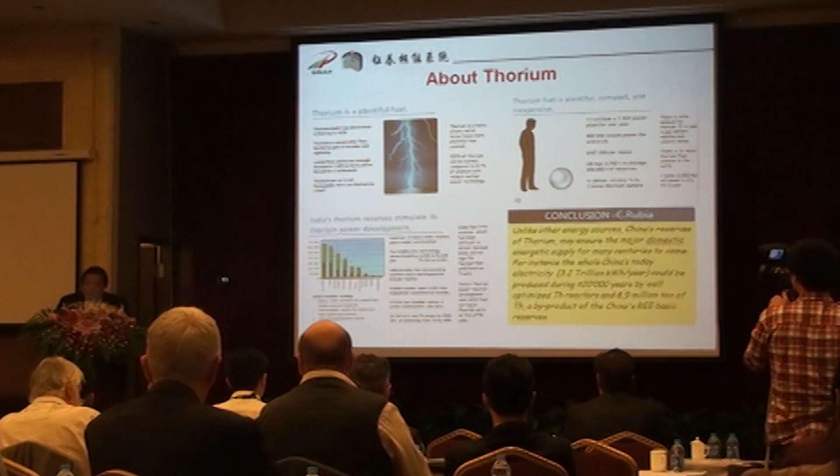There are many reserves, usable for many years, about 20,000 years estimated. In China, there is much more thorium than uranium. This shows that if you want to do breeding, you have to meet conditions of greater than or equal to certain values.

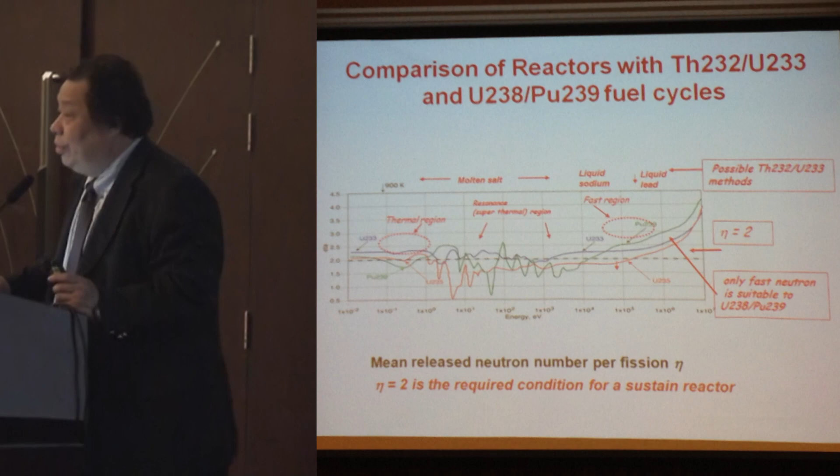This area is the so-called thermal region, and the resonance region is the molten salt reactor working region, which is more suitable for thorium fuel.

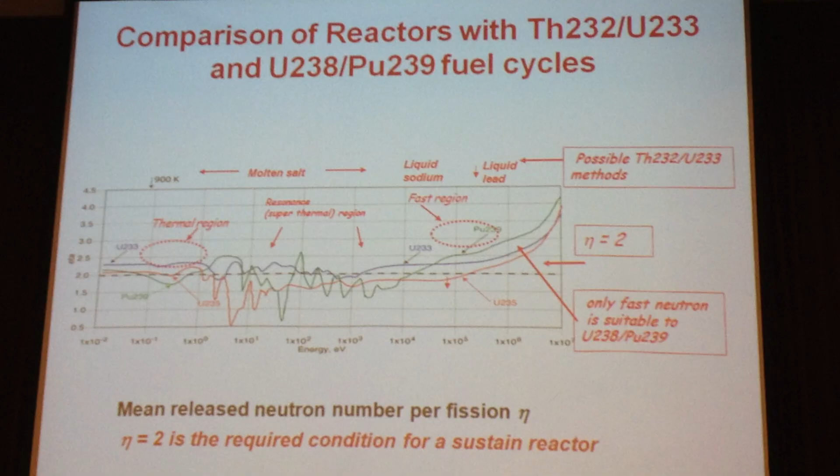The typical molten salt reactor was built by Oak Ridge 40 years ago. American scientists have been working on molten salt reactors for different aims for many years, from the 1940s up to the 1970s.

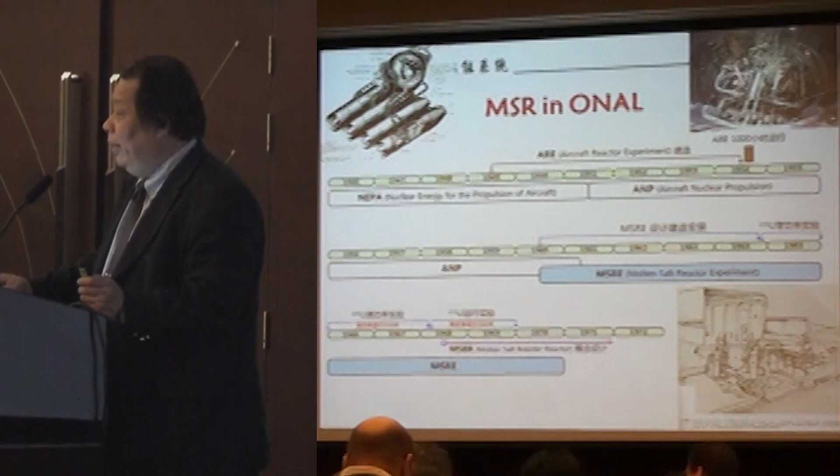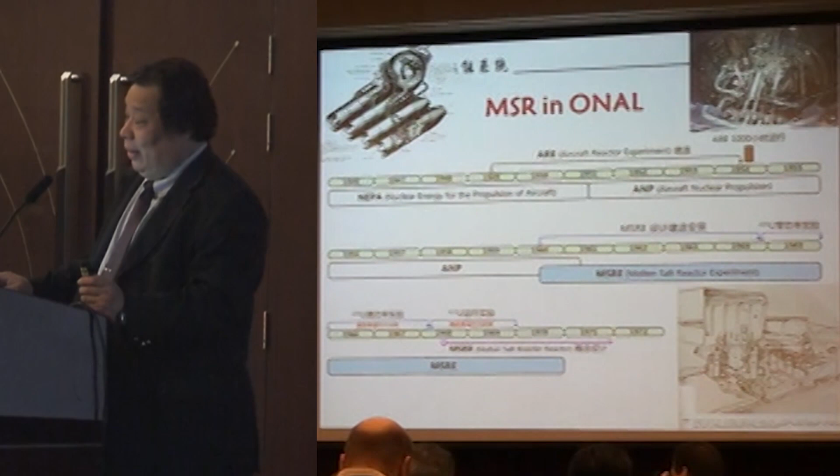At first it was for the aircraft, and then it transferred to civil applications. The MSRE was built and operated successfully for almost 5 years, accumulating many results that form the basic scientific foundation for today's MSR discussions.

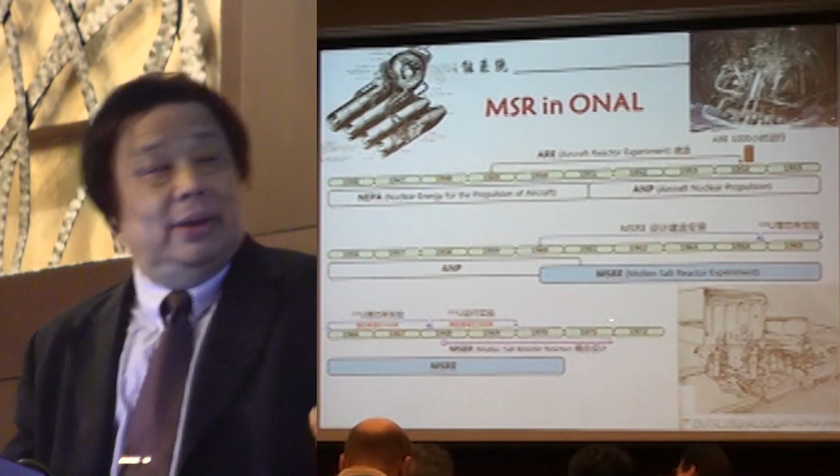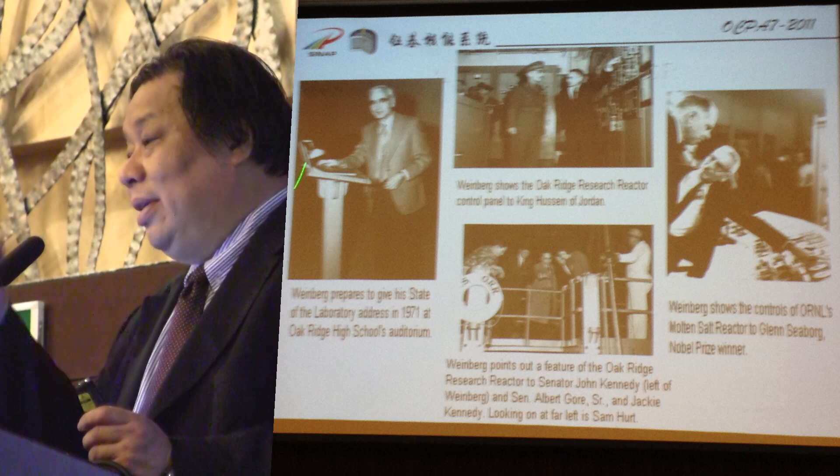They also made a design for a gigawatt MSBR, but just a conceptual design. This is a photograph of Alvin Weinberg. I got a slide from a paper for the Weinberg Foundation. Weinberg was a pioneer of many things, one of them being the MSR.

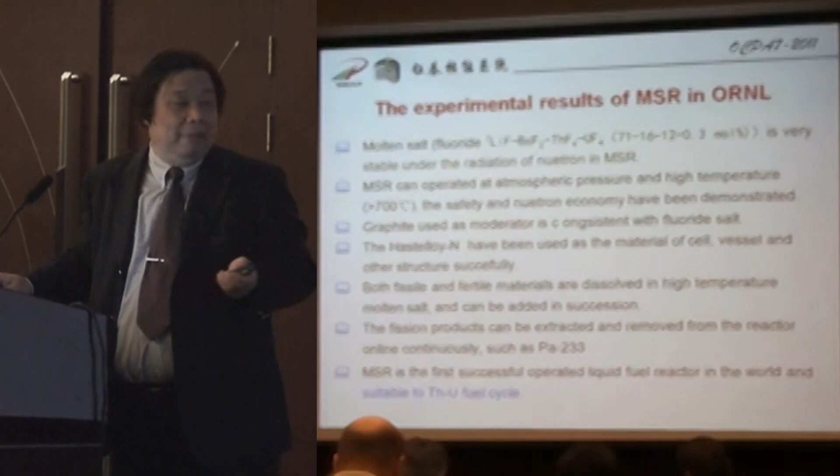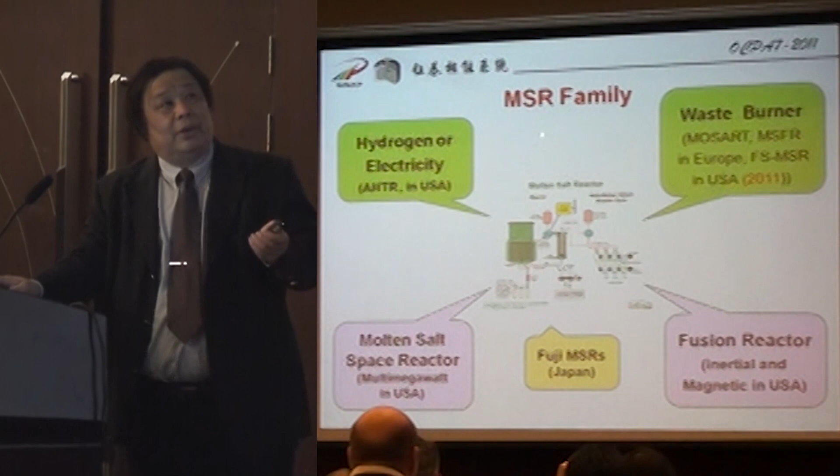This is some results from the MSR experiment at Oak Ridge National Lab. Later, the MSRE was shut down in the middle of the 1970s. Still, there are some research activities in the world. We can show the so-called MSR families here.

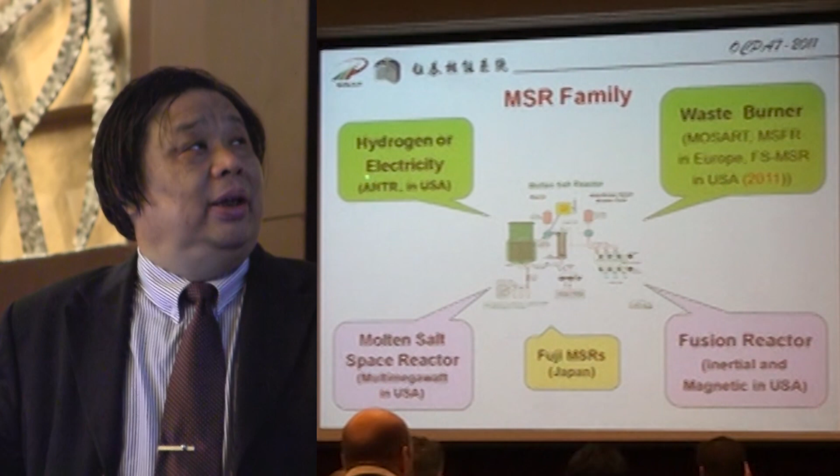The first one is used for hydrogen and electricity production, named the Advanced High Temperature Reactor, mainly in the United States, recently renamed FHR. This one is the so-called waste burner.

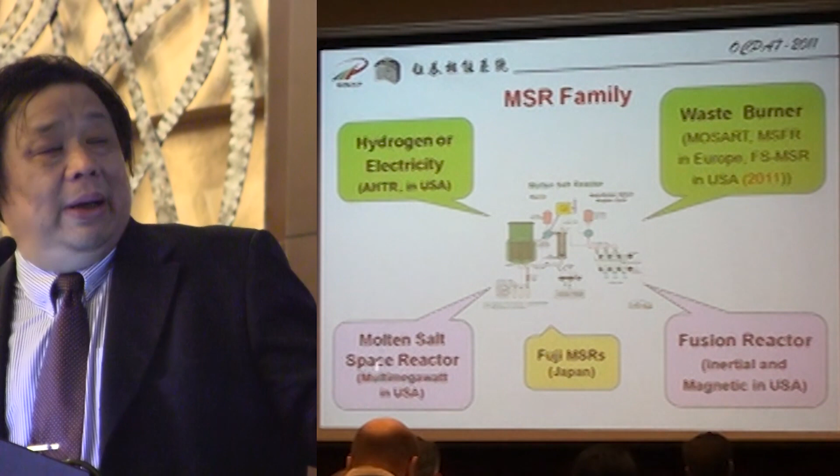There are programs like MOSART and MSFR in Europe, and FS-MSR in the United States. This one is used for space reactors, mainly with designs in the United States. There's also a design combining fusion with fission, the so-called hybrid nuclear reactor.

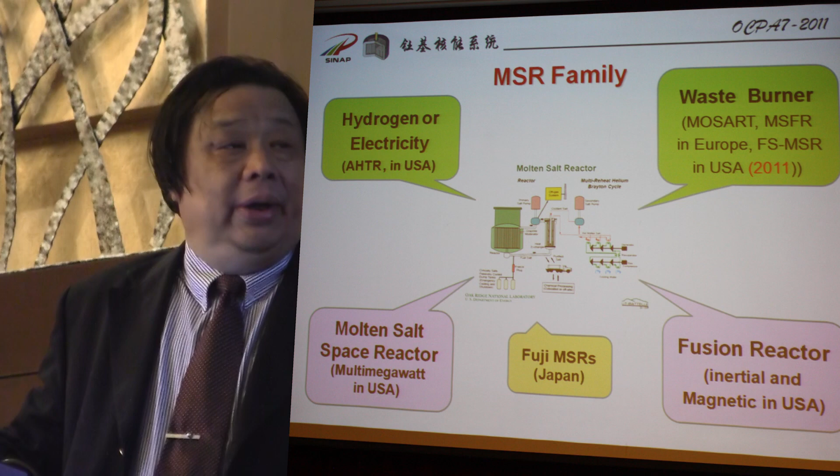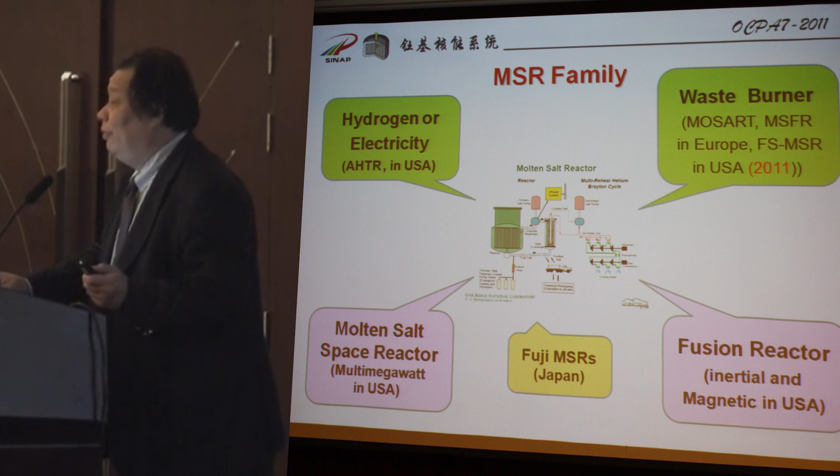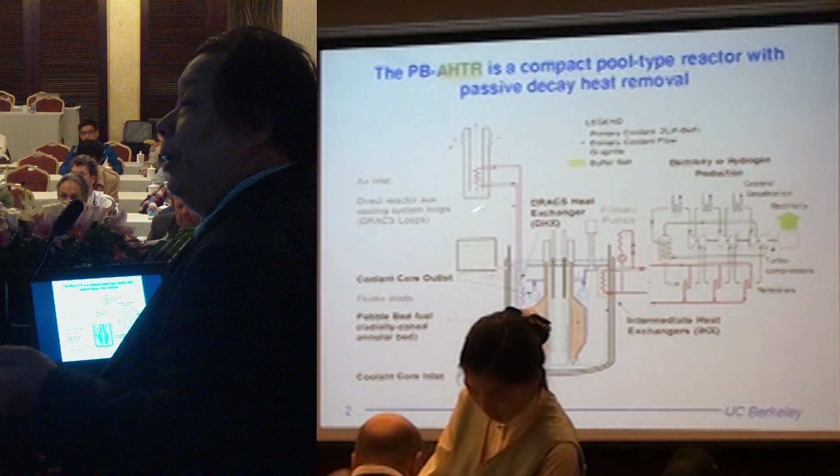And this is the Fuji design. The Fuji design makes the MSR one candidate of the fourth generation reactors, one of the six. The Advanced High Temperature Reactor design is performed by UC Berkeley.

This is the so-called baseline design. These FHRs combine several major technologies together to provide new ideas for the next generation of reactors, the so-called passive safe power.

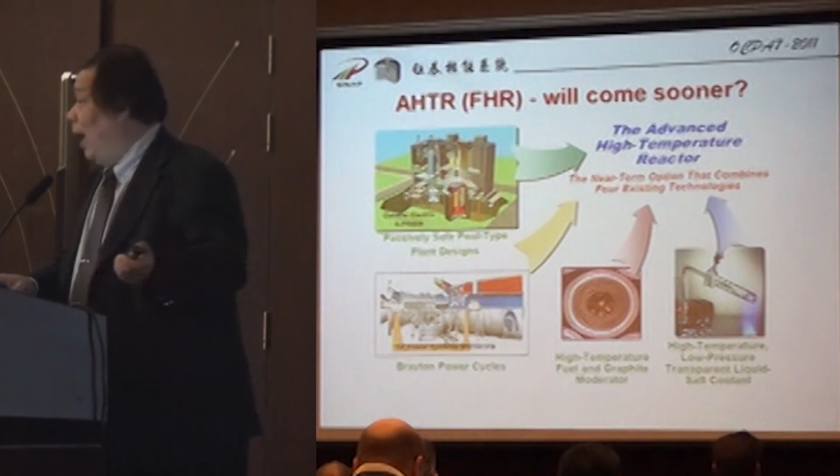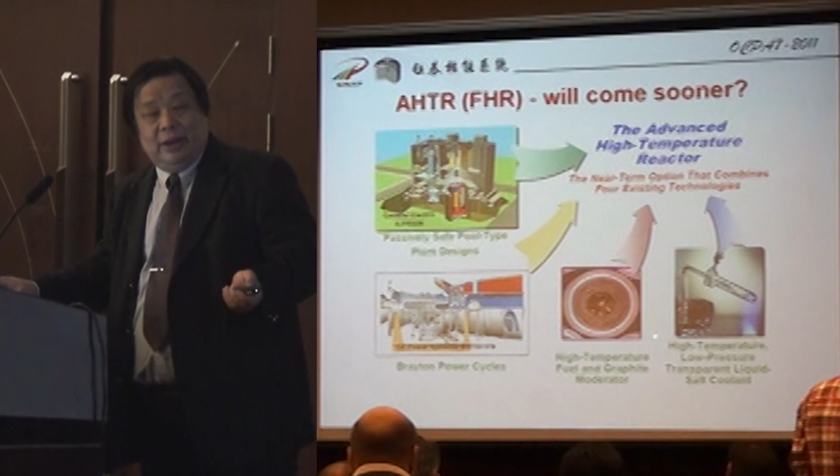This comes from liquid-cooled reactors such as sodium fast reactors and so on. The Brayton power cycle provides high efficiency. This so-called TRISO fuel provides safer nuclear technology. And this is a very important technology, the so-called molten salt reactor, which is high temperature, low pressure, and a transparent liquid salt coolant.

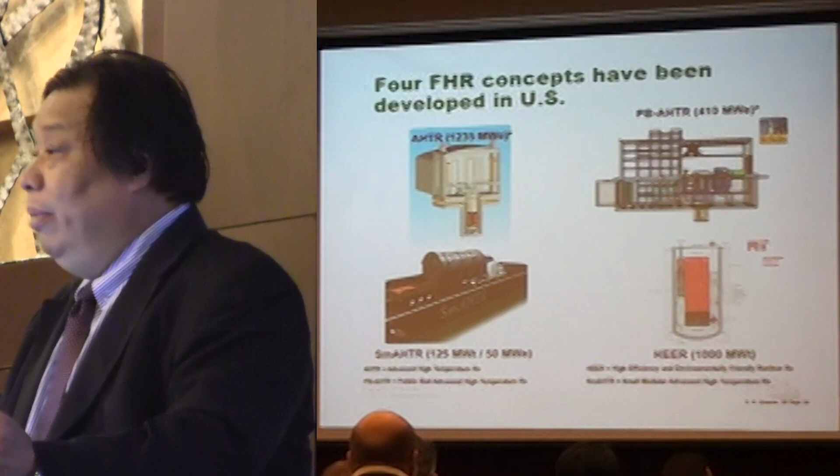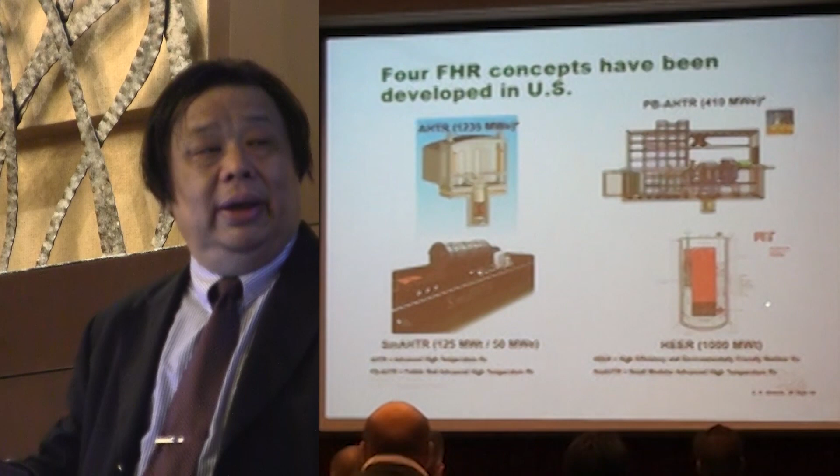Based on these several kinds of technologies, American scientists made several designs for the FHR: a large scale design, a small scale modular reactor design, and the baseline design by UC Berkeley. This one is designed by MIT, and this one by Oak Ridge.

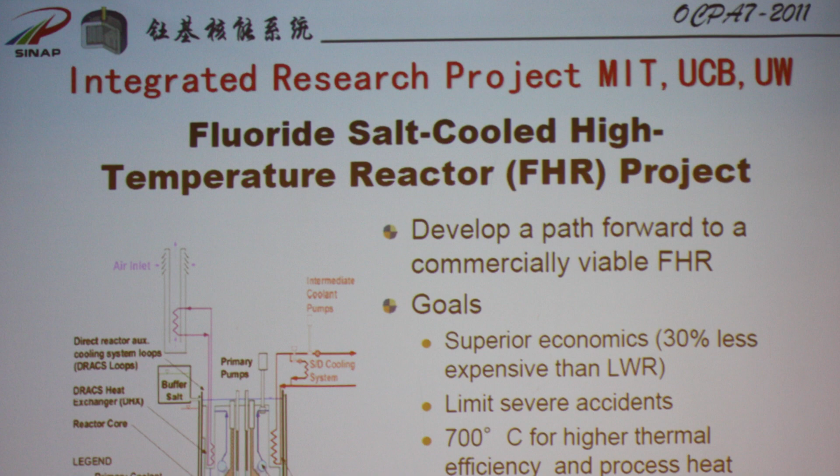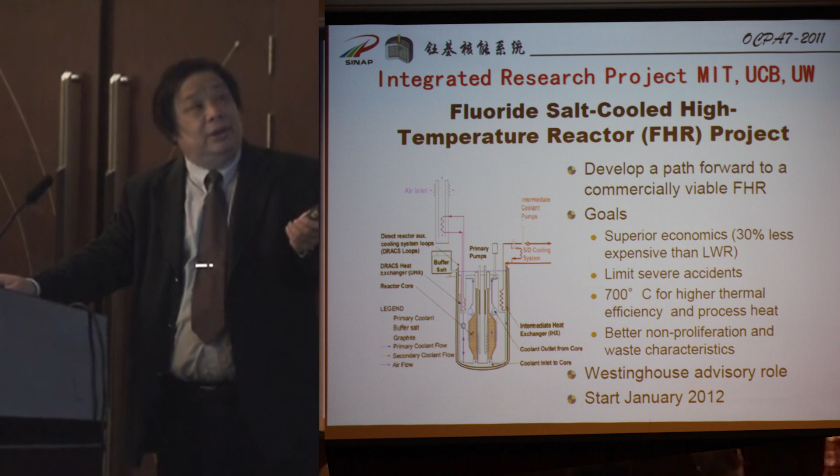The DOE initiated a project, the Integrated Research Project (IRP), performed by MIT, UC Berkeley, and the University of Wisconsin to research FHRs. This is the content of the project. Oak Ridge National Lab and Idaho National Lab have been engaged in this project, with Westinghouse as advisor.

The first national conference on thorium was held in 1965. ThEC12 at SINAP.

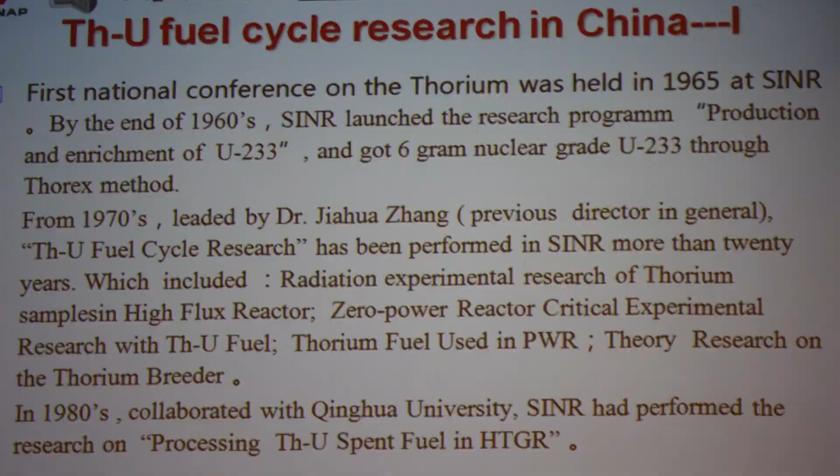uranium-233 through the Thorex method. From the 1970s, led by Dr. Jiahua Zhang, the previous director general of SINR, the thorium uranium fuel cycle research has been performed in SINR for more than 20 years, which includes the radiation experiment research of thorium samples in a high flux reactor, zero power reactor critical experiment research with thorium and uranium fuel, thorium fuel used in PWR, and theory research on the thorium breeder.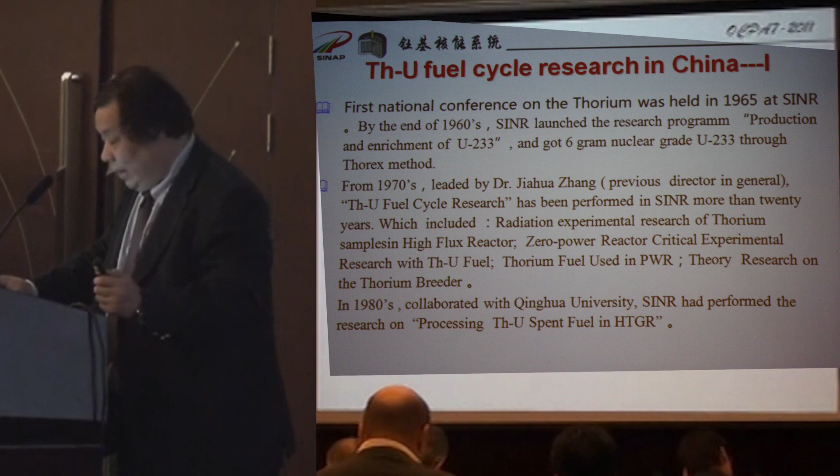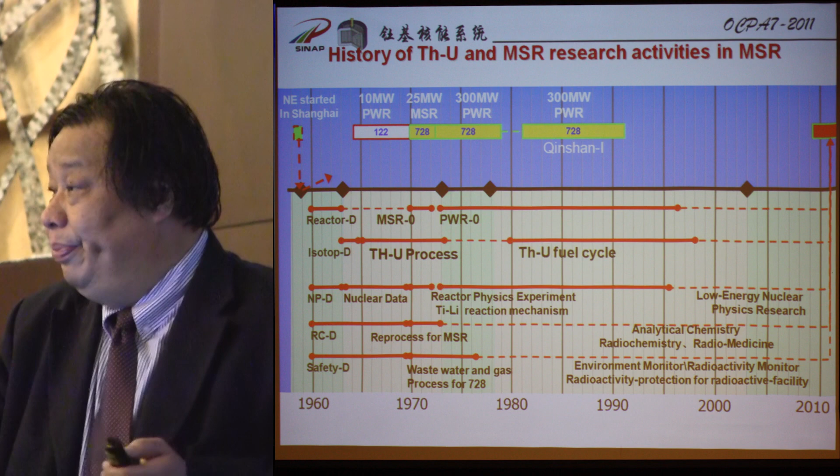In the 1980s, in collaboration with Tsinghua University, SINR performed research on processing thorium uranium spent fuel from high temperature gas cooling reactors. Here shows some history on the thorium uranium fuel and MSR research activities in SINR.

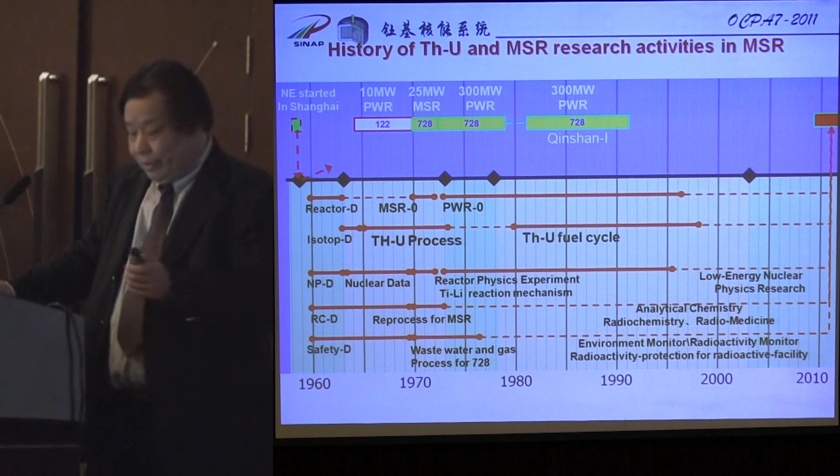SINR has constructed zero power reactors. One is MSR, which I mentioned yesterday, and another is the so-called light water reactor, and we have performed many years of reactor research on thorium.

This is the so-called zero power cold MSR, built in 1970 to 1971, and it reached critical in September 1971. There's some data. Later, SINR built another zero power reactor.

It's a light water reactor.

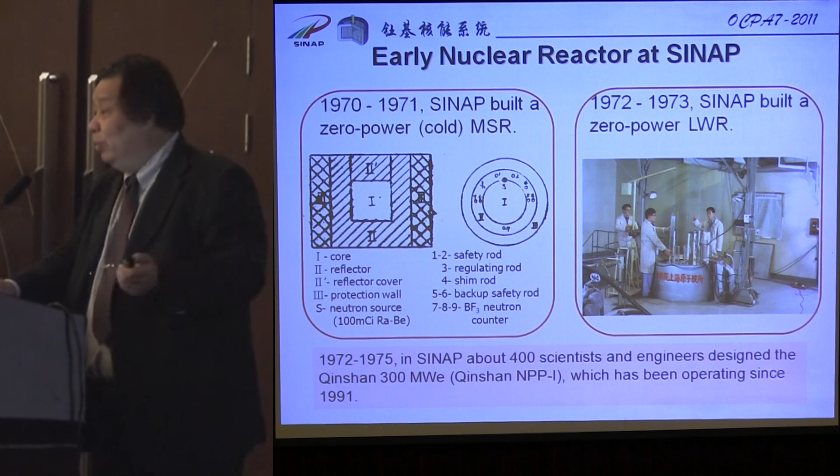Recently, there have been several proposals and reports on the implementation of thorium as a nuclear fuel submitted to the central government from the beginning of this century. And 3 Chinese companies launched collaboration with AECL, a company from Canada, on evaluating implementation of thorium in the CANDU reactor.

Under the approval of the government, CAS initiated the Innovation 2020 program and deployed the Strategic Pioneer Science and Technology Project. It's a very long name, and one of them is Advanced Nuclear Fission Energy of Tomorrow.

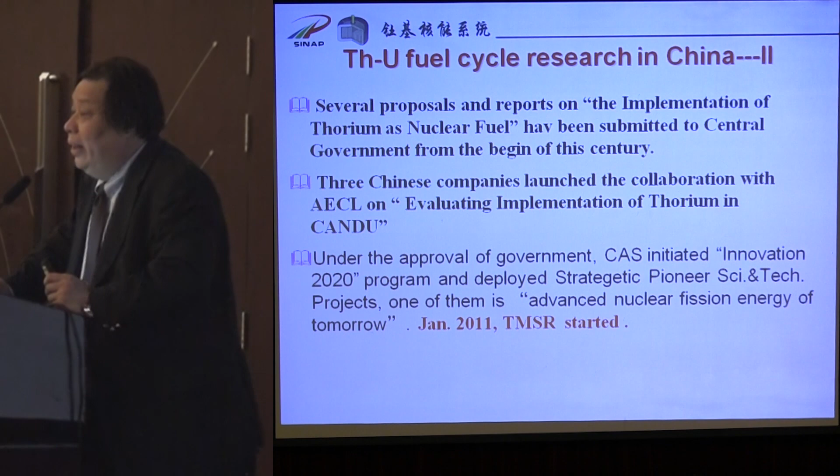Within this, one is the TMSR. It was approved in January of last year, and TMSR started from then. The aim and roadmap is to realize the thorium and uranium fuel cycle mode in TMSR.

And for non-electricity application and electric application, there's the PBFHR. We will build a 2 megawatt molten salt cooled test reactor and a non-electric application test facility, such as for hydrogen production. The project is long term, about 20 years, and the aim is to build a 100 megawatt test reactor.

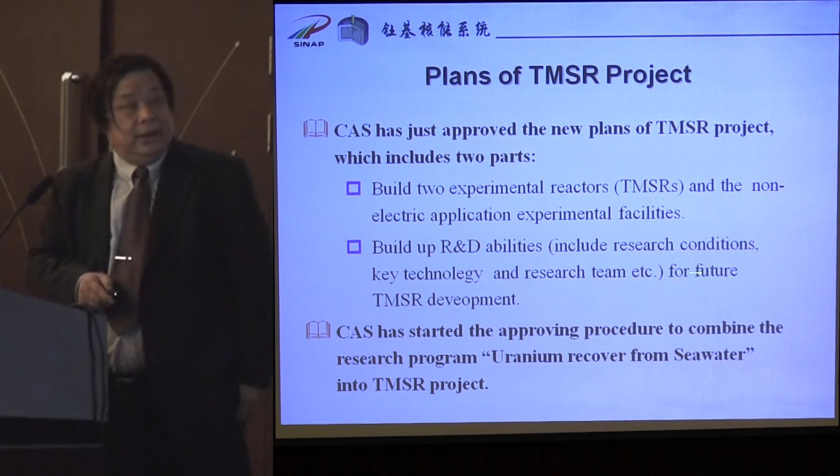The more detailed plan is to build 2 experiment reactors, TMSRs, and non-electric application experiment facilities, and build up R&D ability, including research conditions, key technology, and the research team for the future TMSR development.

CAS has started the approving procedure to combine the research program of uranium recovery from seawater. That's another story. One is the 2 megawatt pebble bed fluoride salt cooled reactor. We call this the TMSR with solid fuel.

The timetable terminal is 2017, it shall be finished. Another one is the 2 megawatt molten salt reactor. It's a liquid fuel reactor with a thorium uranium modified open fuel cycle, and this with a thorium uranium alternative once-through fuel cycle.

This is the 100 kilowatt SOEC experiment facility for hydrogen production, implementing high temperatures. And there's a 1 kilogram per hour methanol reactor experiment facility, and a 100 kilowatt CSP, which mainly implements the molten salt loop technology.

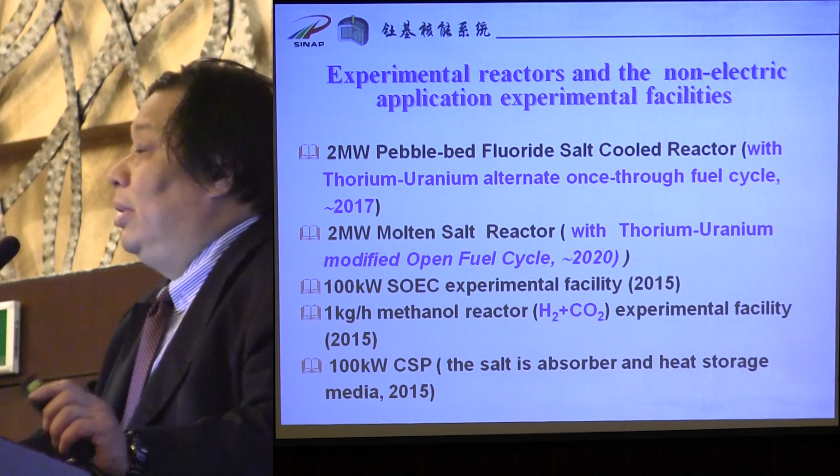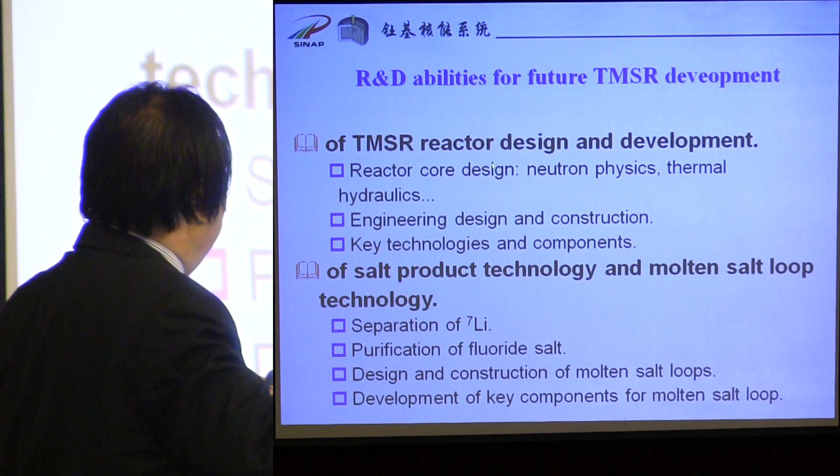The ability to be built in the future: the first one is TMSR reactor design and development, which involves physics design, engineering design, and so on.

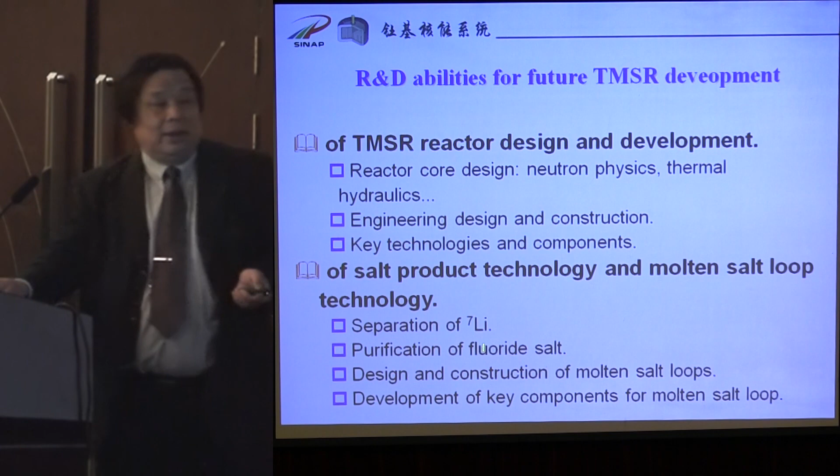Then later is the salt production technology and the molten salt loop technologies, such as separation of lithium-7 and purification of fluoride salt, and design and construction of the molten salt loop.

The third one is fuel technologies: production of nuclear grade thorium, and online chemical separation, the so-called pyro process. We have begun research in this field.

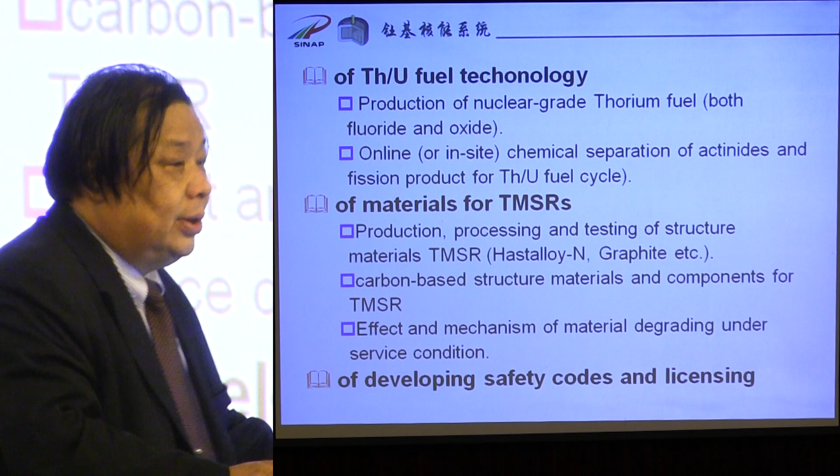The fourth one is for materials. The molten salt loops need different materials; it's a key problem, a key challenge, including the production, processing, and testing of structural materials. First is the Hastelloy-N and the graphite, and later we will develop carbon-based structural materials and components for TMSR.

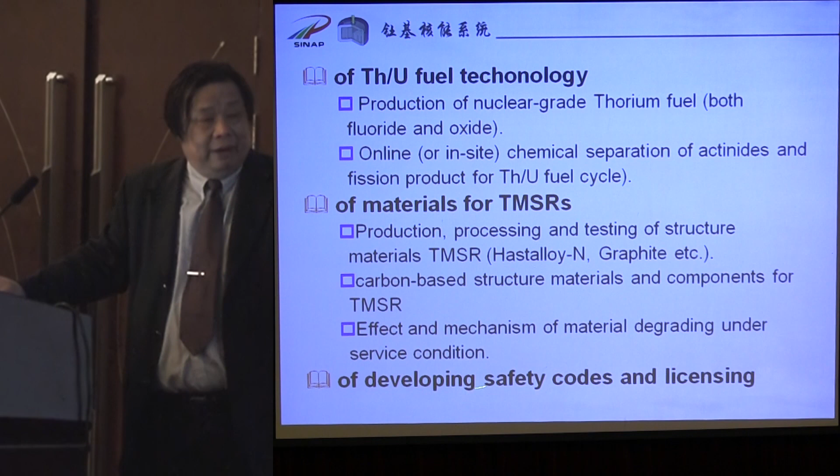And finally, we are developing the safety code and licensing technologies. This map summarizes the contents I mentioned above. We will build 2 reactors.

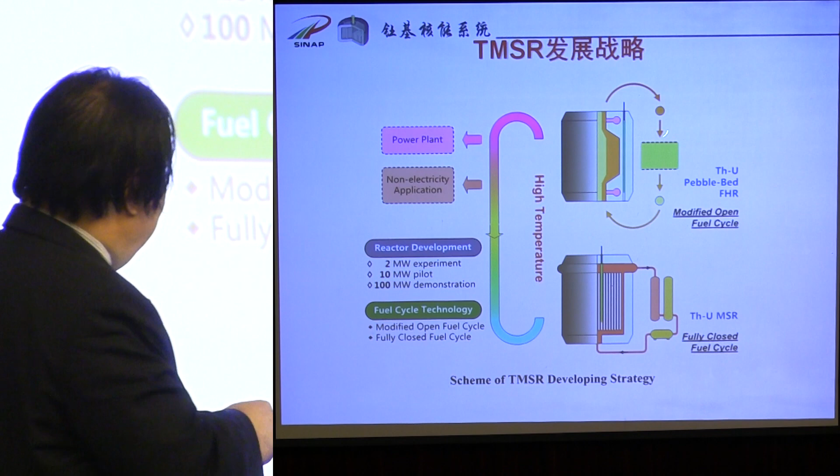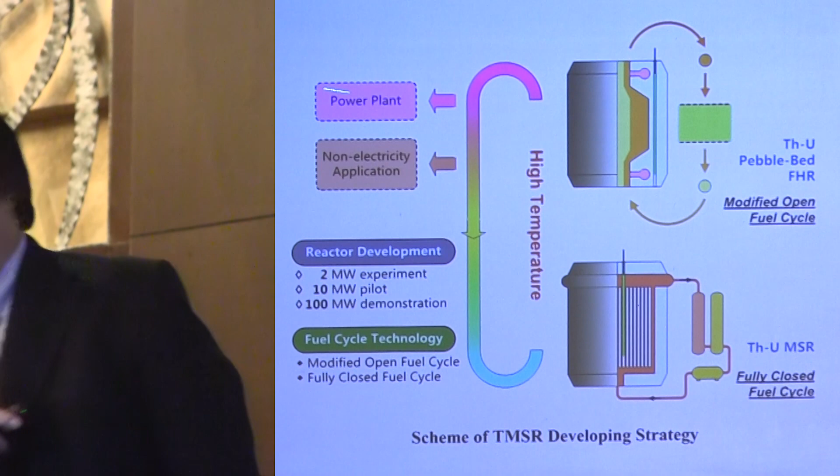The first is the so-called pebble bed FHR with a thorium fuel partly. This is the MSR with a liquid fuel, and the output is high temperature.

This is the development roadmap: 2 megawatts, 10 megawatts, and 100 megawatts. It's the so-called 3-stage approach, and this is the fuel cycle technologies.

We start from a modified open fuel cycle. The final aim is a fully closed fuel cycle, with commercial applications such as 1 gigawatt reactors. If we want to build this, we have to develop these technologies.

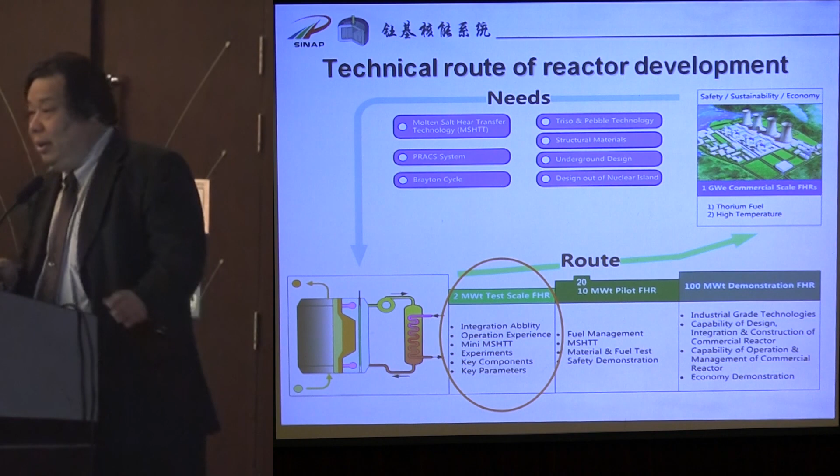We have a working breakdown with 3 steps. In different steps we have to solve different problems or develop different technologies. Step by step, if we can solve all the problems, we can succeed in reaching the gigawatt level reactor.

Then the team and organization. The team is very important. The basic team comes from SINAP, and we have experience from SSRF. SSRF is a project, and we need engineering experience for physicists and chemists. It's very important for the nuclear energy engineer.

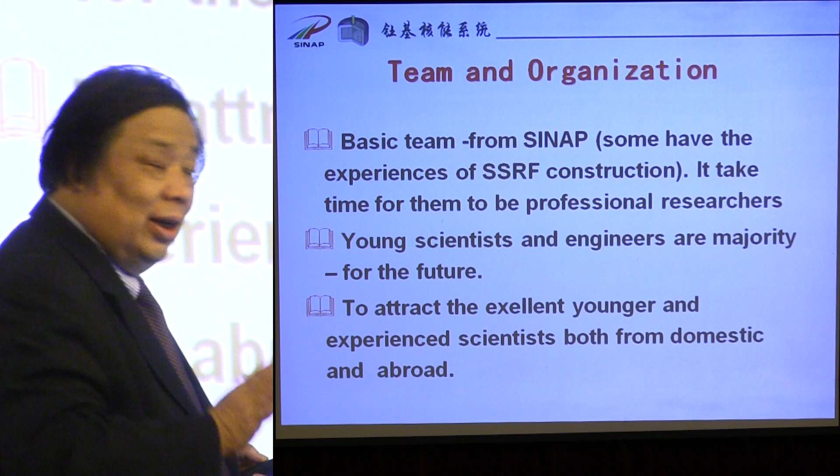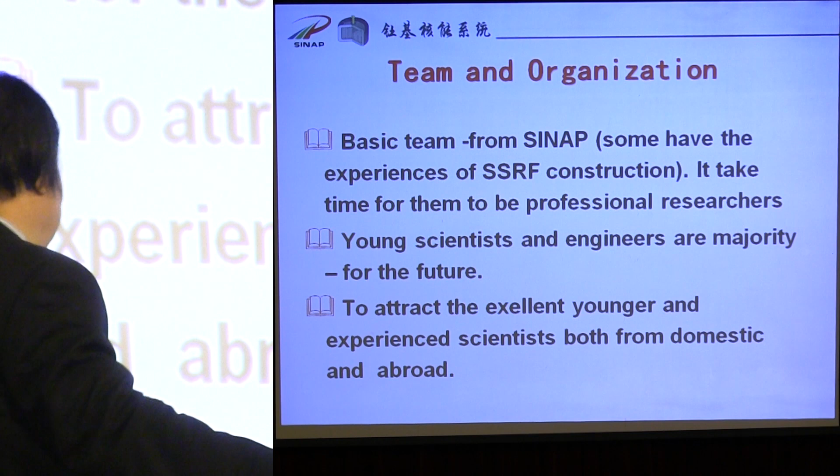Young scientists and engineers are the majority, for the future. Later I will show the team. We also aim to attract excellent young and experienced scientists, both from domestic and abroad.

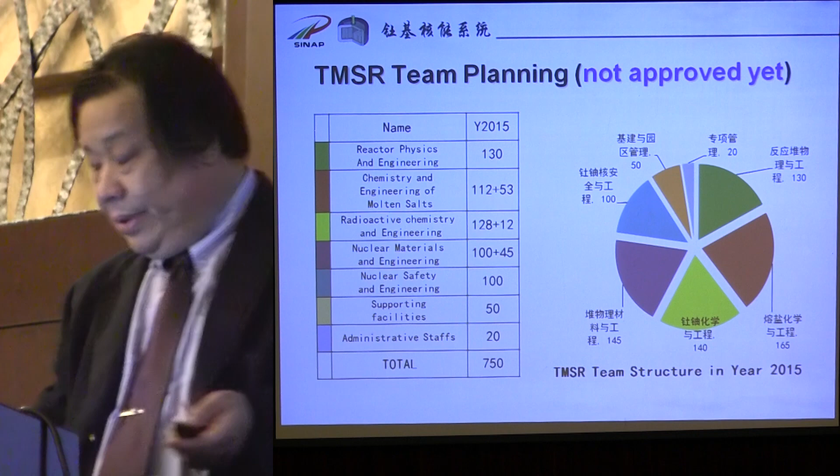This shows the team structure. We have several divisions, and here is the team total in the planning number for 2015. That's the planning number, and at the moment we have this number.

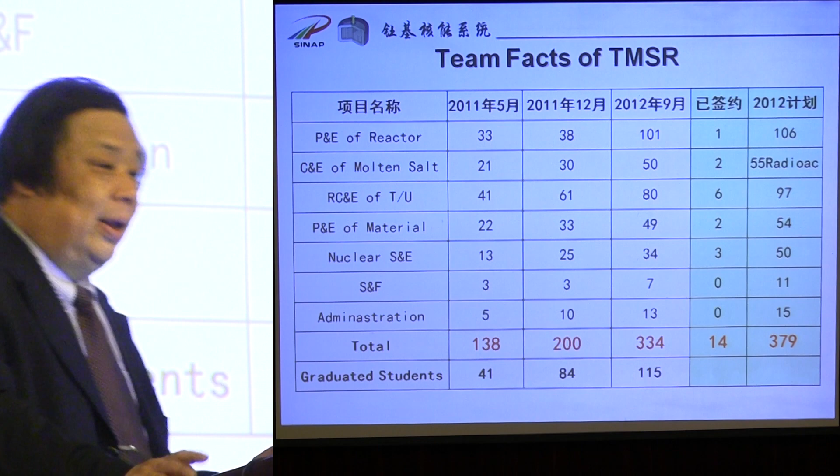It's about 350 permanent staff. From the beginning of last year, within 2 years, we have had more than 300 staff already.

This is some structure of the team, the so-called age structure. About half are in their twenties.

That is, running from 20 to 30. As I just said, the young are the future, so our team is very young, and we shall have a bright future.

My age is in a very narrow place, very narrow—a little below 60 years old.

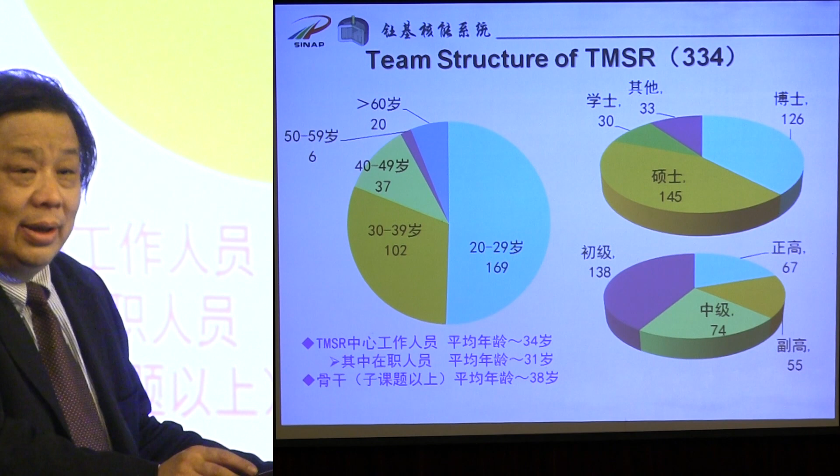We also have some experienced scientists and engineers. Most of them are older than 60, and some older than 70. But I know that during that period, China trained some experienced scientists and engineers.

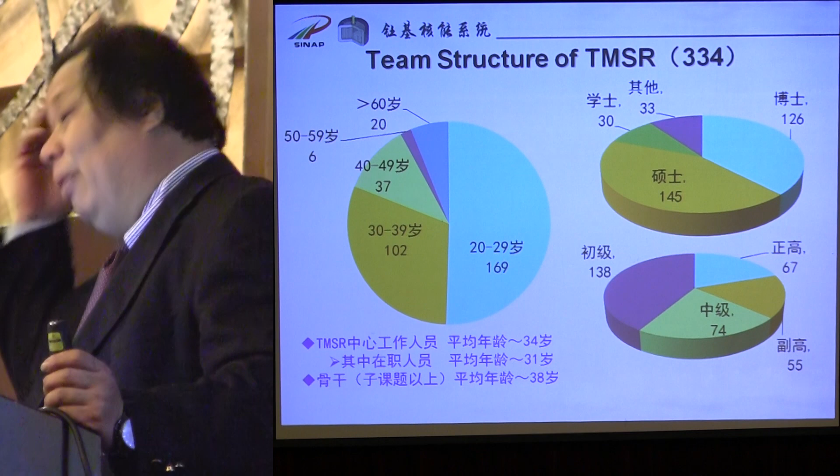And we have other staff. Almost half, about 40%, are PhDs, and others are so-called engineers, because we have many engineers.

This is the so-called organization structure. We have a center funded by CAS and led by CAS directly, and we have several departments here. The center has a board.

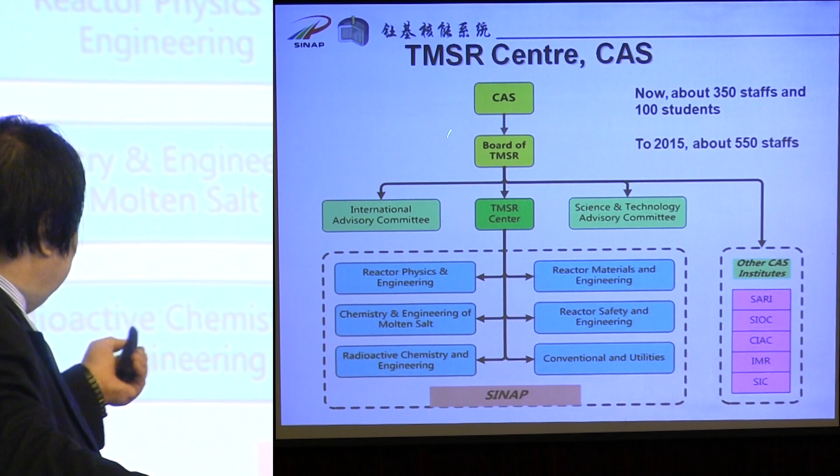And the center here—now I'm the director of the center, and Dr. Jiang is present here for this project. Yesterday he gave a presentation on the outlook of China's energy.

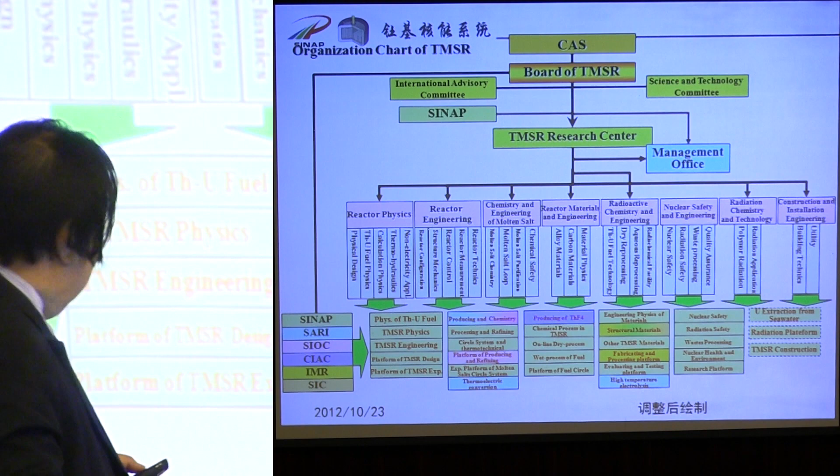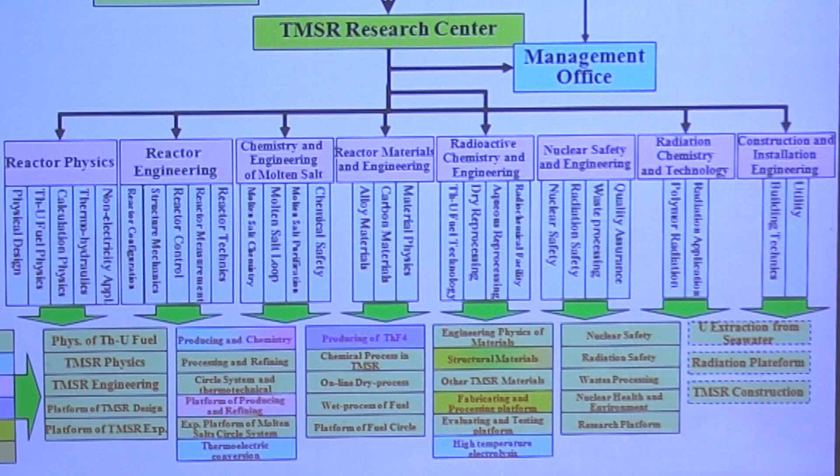We have so many divisions, 8 in total. Last year we had 6. Maybe next year we'll have 10, maybe more than 10.

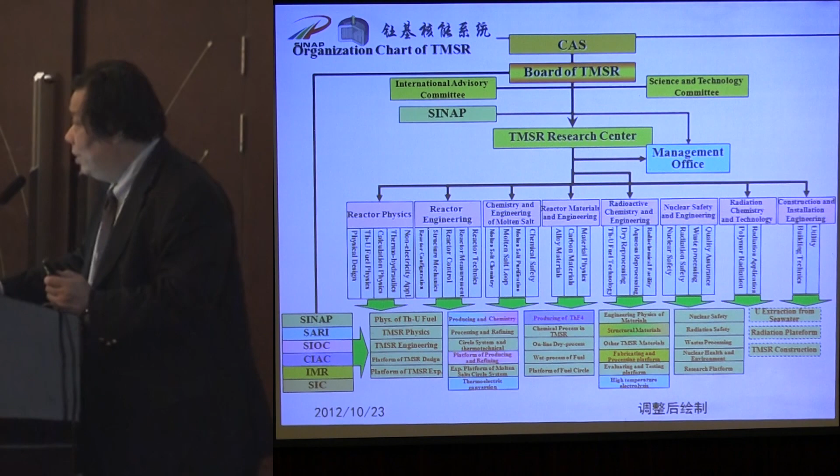We also have other institutes engaging in this project, about 10 in total, such as organic chemistry and metallurgy chemistry institutes and so on. They are in charge of different missions, especially producing materials.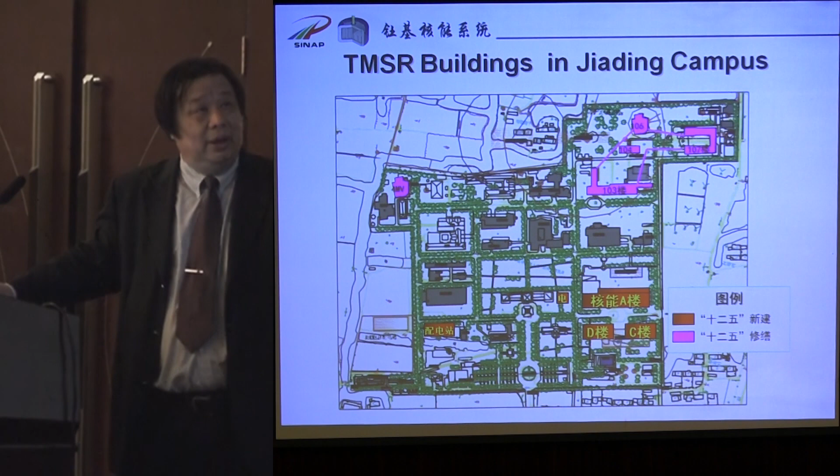This campus is in the south, and now we have an older campus too. We have built some labs, and recently we have a computation platform for the design of our project.

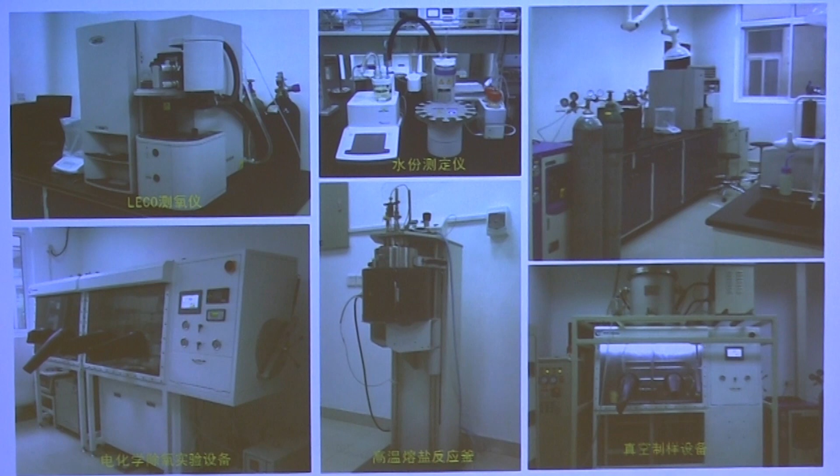We have built the laboratory for molten salt chemistry, and we have molten salt loop development plans. This is the first one.

This is for the reactor—we have finished this one. This year I finished this one, and last year this one, and so on.

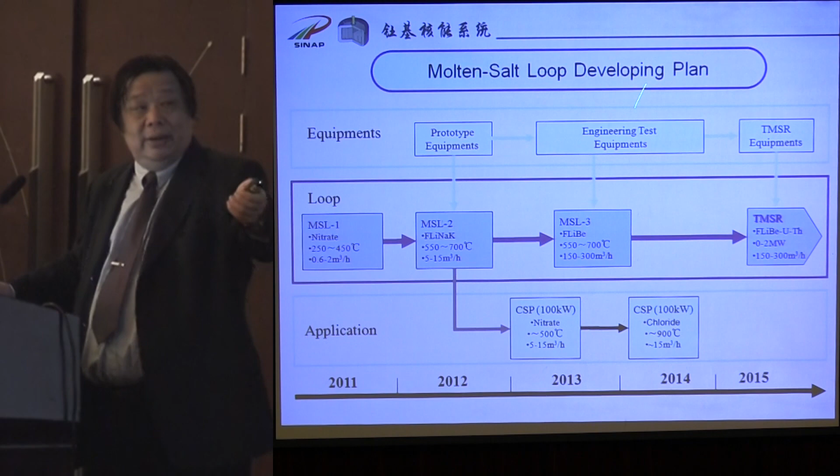This is the first loop, and this second one is the design. And for the salt pump, we are building the prototype.

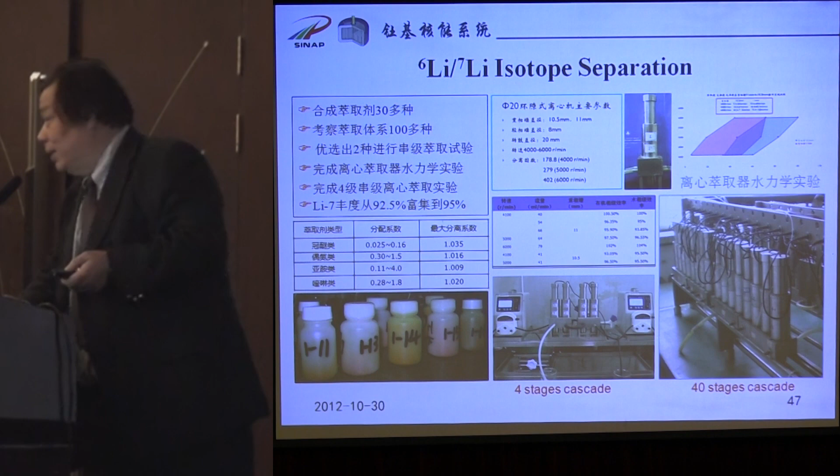This is the separation of the lithium isotope. This is the material development roadmap.

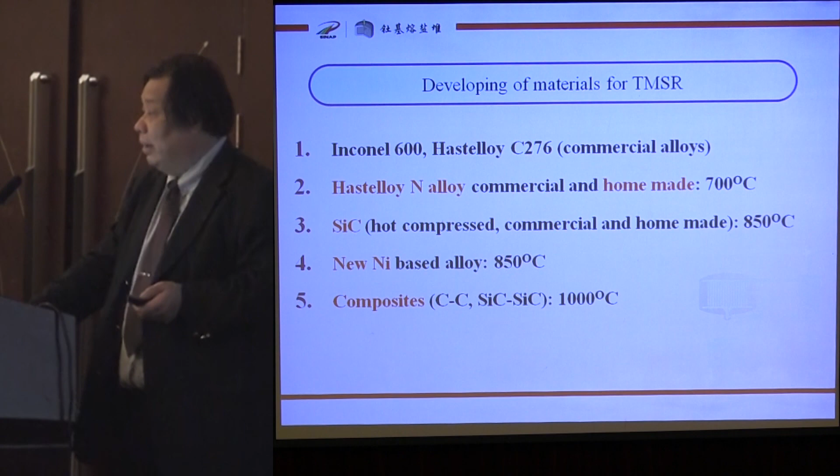I've shown we have built our own Hastelloy N alloy, and also purchased from the United States. We also built silicon carbide material, tried some new nickel-based alloy elements, and built some composites based on carbon-based material.

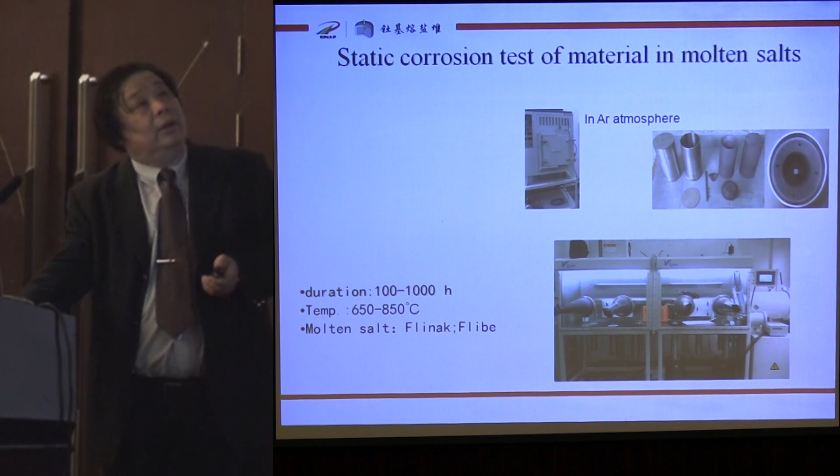And then for the material technology roadmap, there are some experiments, and this is for the pyroprocess—pyroprocess. Pyroprocess is very important for the TMSR implementations. We have set some guidelines and are focusing our efforts on these two methods.

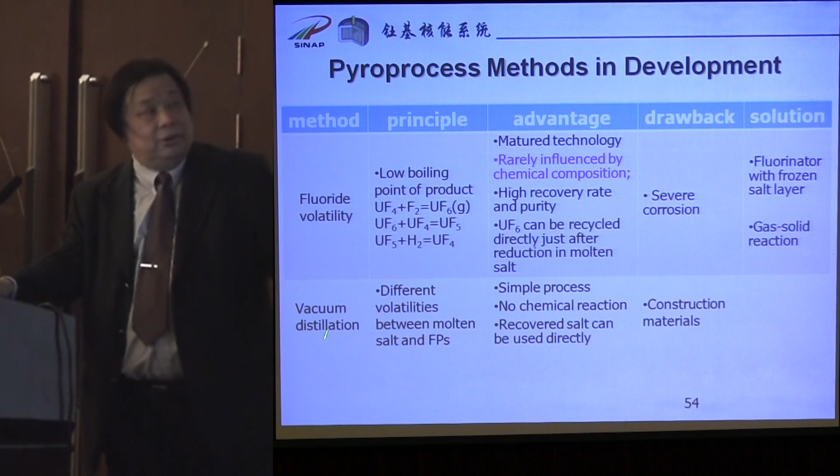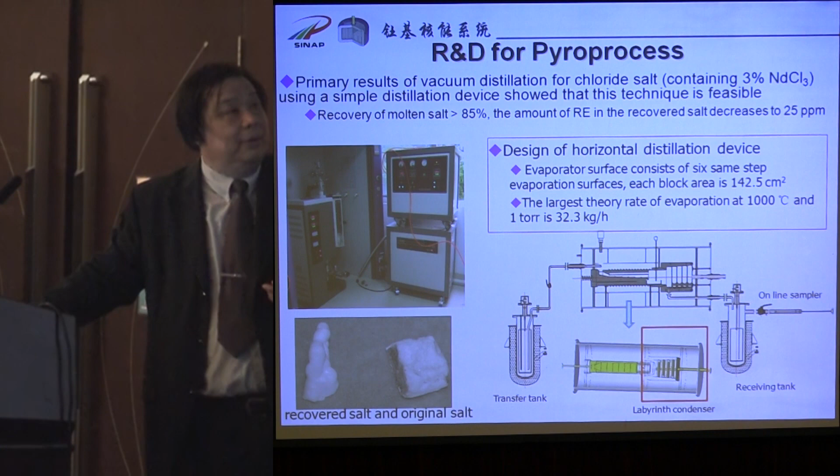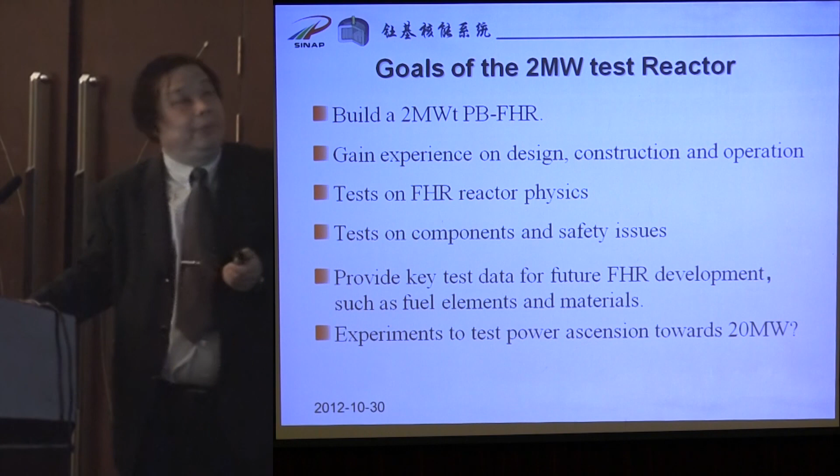We have built the experiment facility and have done some experiments, and also discussed with American scientists from the DOE about possible collaboration between us. This is the so-called 2 megawatt test reactor.

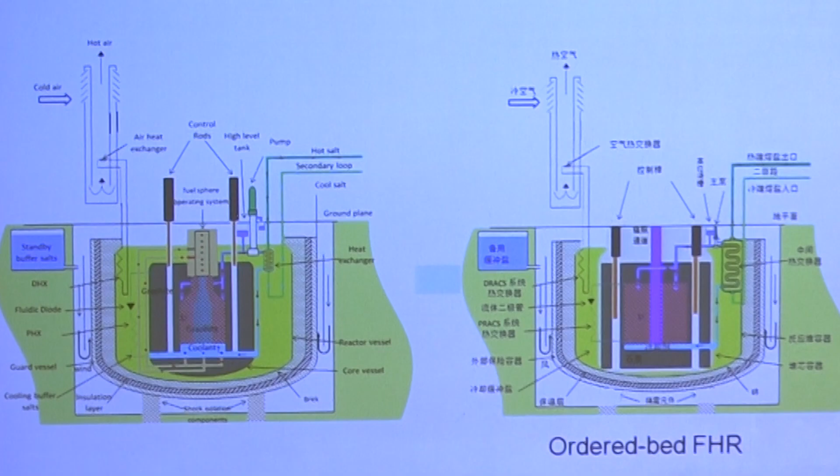This is our design for the test reactor, with the main parameters. We held an international review meeting with most experts from the United States and one from Russia.

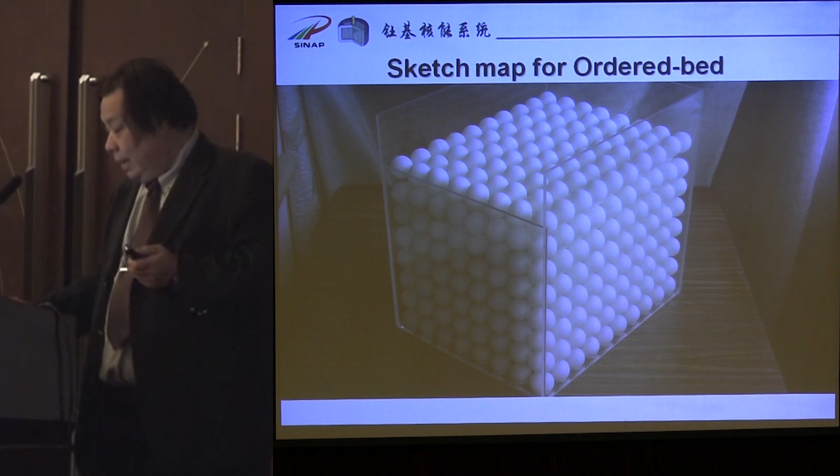For the pebble bed, you have two choices: one is the ordered bed, and another is the random bed. Recently, we combined the two designs and optimized them.

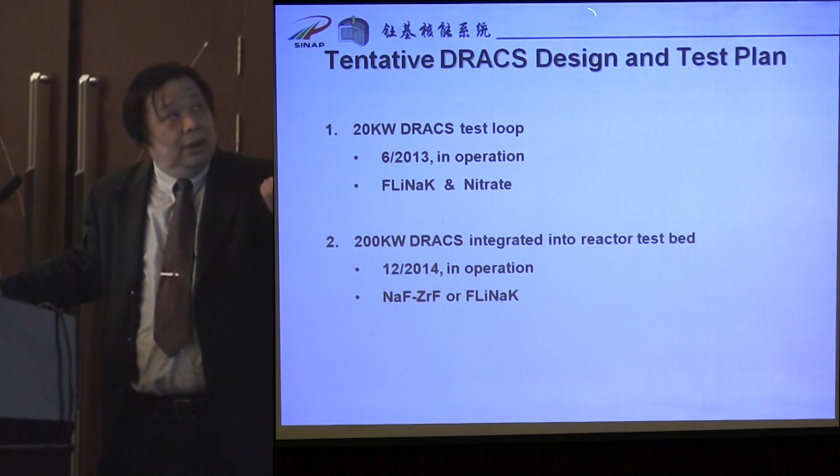The initial residual heat removal system is based on natural cycle. We are designing the system, and we will build the test facility next year.

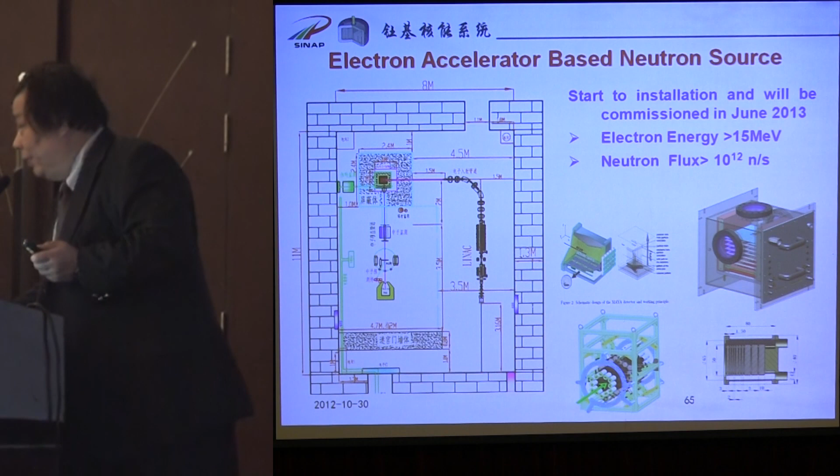We also built our own accelerator to measure some data for the cross-section. This is some of the design.

For the project, the budget is actually very good. Within 5 years, we have almost $100 million US. We hope we can start the molten salt reactor research, and also the thorium implementation research for the future. Thank you for your attention.

You've presented a wide range of projects, do you have questions? Thank you very much for your wonderful presentation. My name is Takashi Kamei, coming from Kyoto, Japan. I have 3 simple questions.

The first question: how much capacity are you going to implement for the thorium molten salt reactor in China, for example by 2050? The second: what kind of fissile material are you going to use, for example plutonium, uranium-235, or uranium-233 with thorium? The last question: if you use uranium-233, how do you obtain it? Also, how many reactors are you going to use, and equipment for all the test reactors?